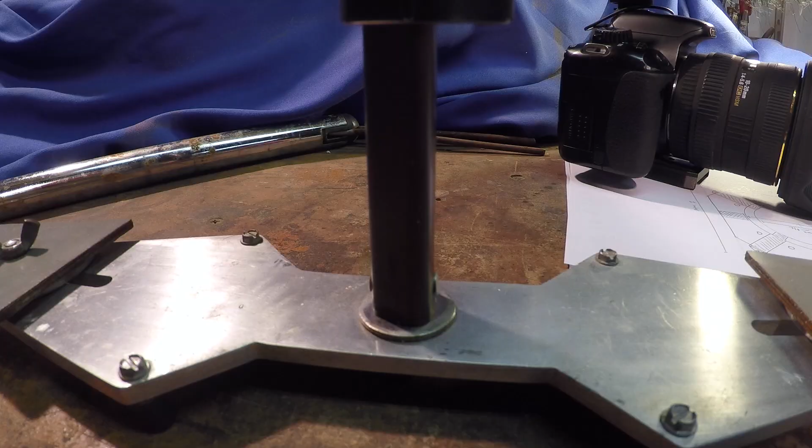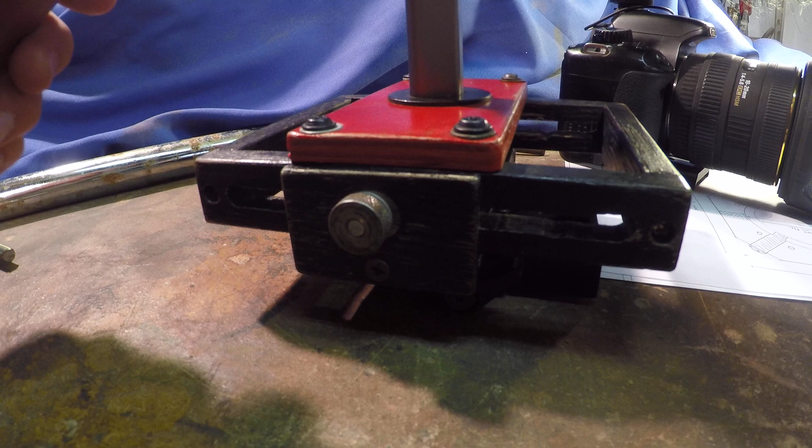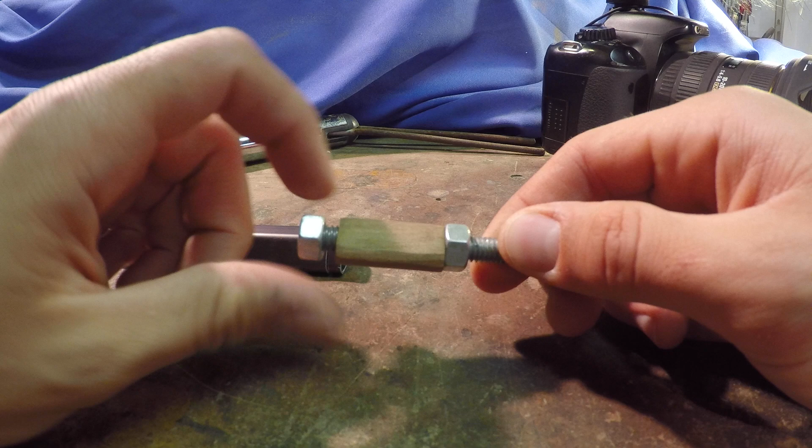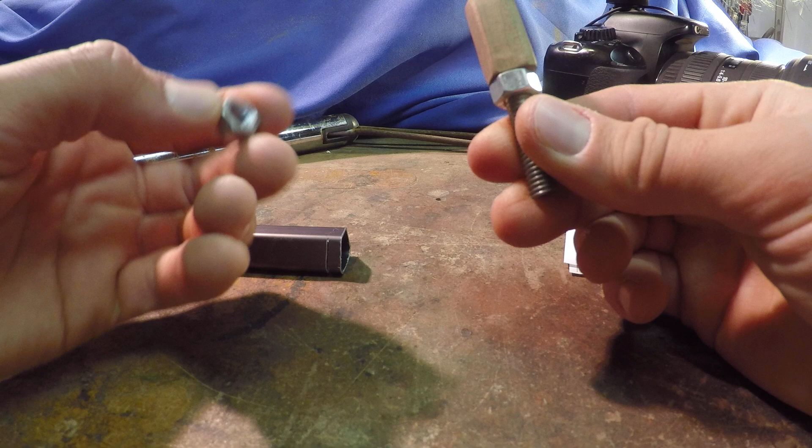Another really common question is, how do I mount this tripod leg to this base plate, or how do I mount the top plate to the tripod leg? People think maybe the bolt goes all the way through the leg, but it does not. Here's how I actually mount that, since maybe it wasn't clear enough in the original video. What I do is get a bolt or threaded rod piece of about 2 or 3 inches for the bottom, and for the top it'd be anywhere around 7 or 8 inches. Then I get the corresponding size nuts, 2 of those.

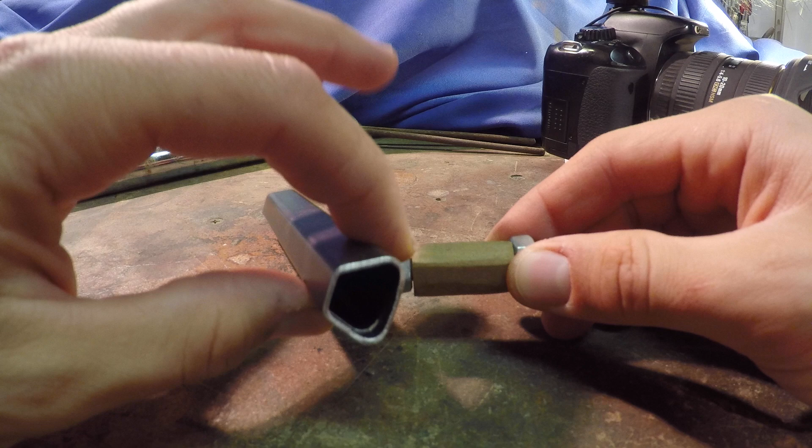Then I get a piece of wood, maybe a 1-inch piece, any kind of wood, doesn't matter. I drill a hole through it that loosely fits this bolt or threaded rod piece. Once drilled, I sand or file this piece of wood down so it loosely fits inside the diameter of your tripod. The key is that it's loose. If your tripod is circular, make a circular piece of wood that fits right inside, loosely, like that.

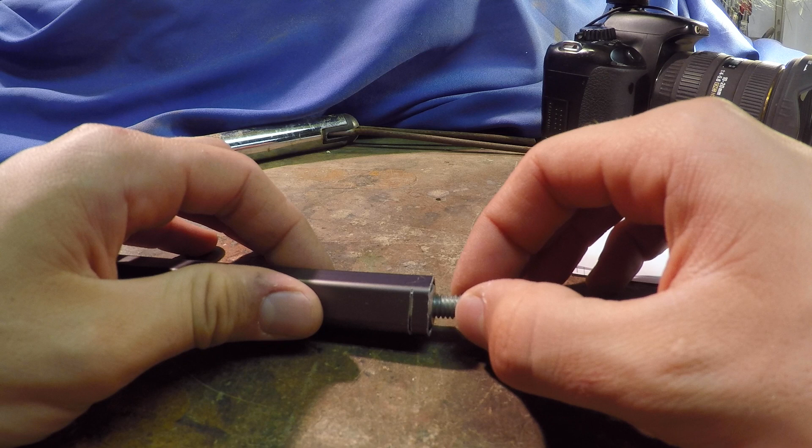Once you've got these bolts and nuts that fit, you insert the contraption with the threaded rod and bolts inside your tripod leg, and then glue it in there. I use epoxy, but it can be any hard setting glue, like quick JB Weld, or even Elmer's or wood glue. But if you're using wood glue, make sure you drill a hole and put a bolt through there — I'll show you how to do that later. Basically, you insert this in here.

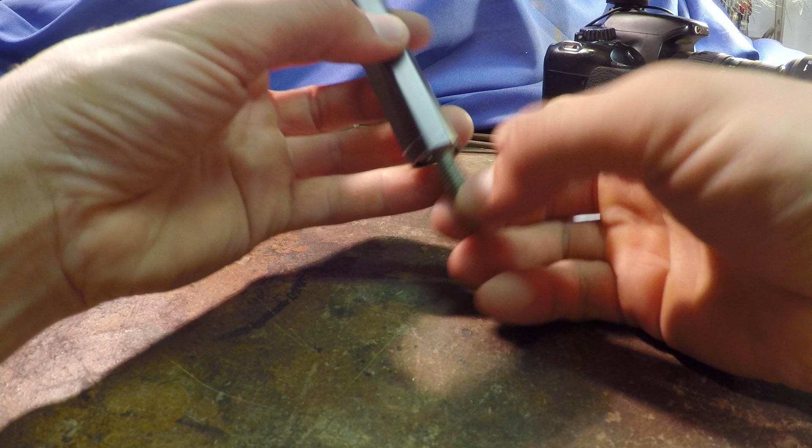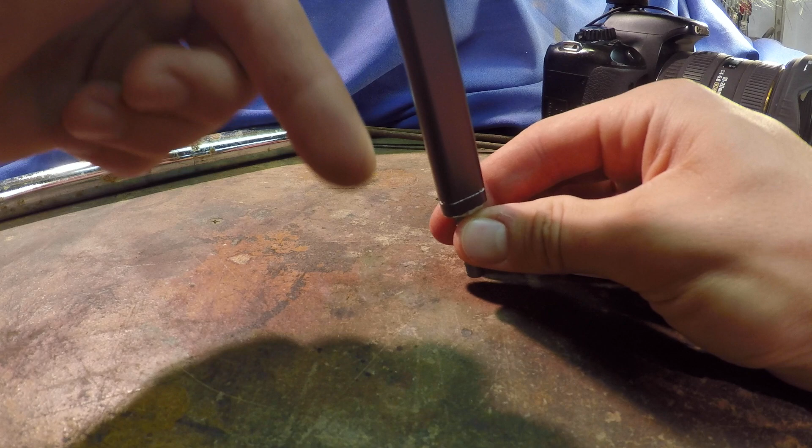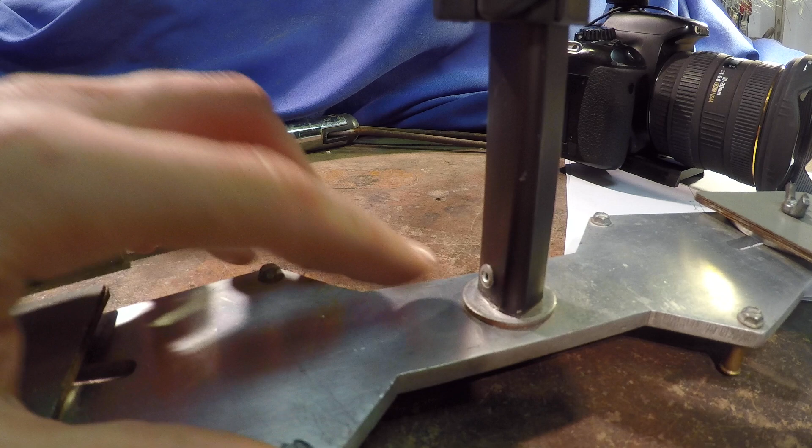Make sure it's aligned perfectly, this way and that way. You pour your glue in there. If it's too liquidy, the glue will keep pouring through, so you might have to tape it around the bottom and pour it in from the top. If you're using epoxy, let it set part of the way, then straighten it out to make sure it's all straight. Once it's set — and this is a very important step — drill a hole straight through the tripod leg, the wood, and the threaded rod, and insert a rivet or screw with a nut on the other end, like this. You can see here what I've done: I've drilled a hole and inserted rivets on both sides.

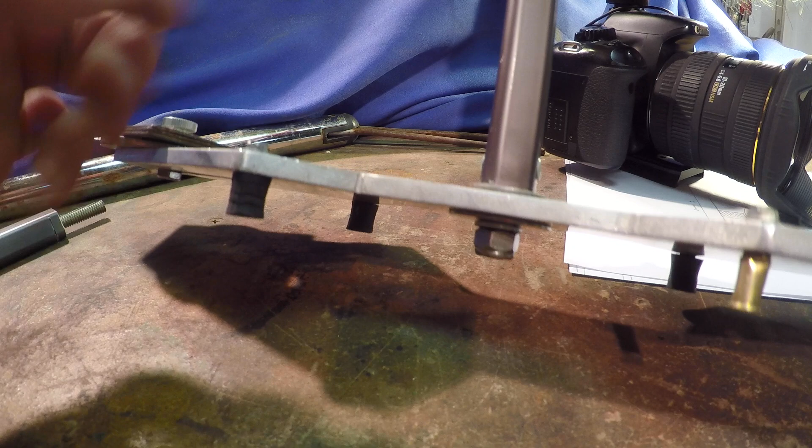This is really important because I didn't do this before: when you tighten the bottom nut, the glue might not be strong enough to hold it, and the whole threaded rod could start coming out. So this is a safeguard with a bolt or screw so it'll never fall out. That's how you attach this bolt into the bottom of the tripod leg. You don't stick a threaded rod all the way through, because then you won't be able to adjust your tripod to length, and that's really important.

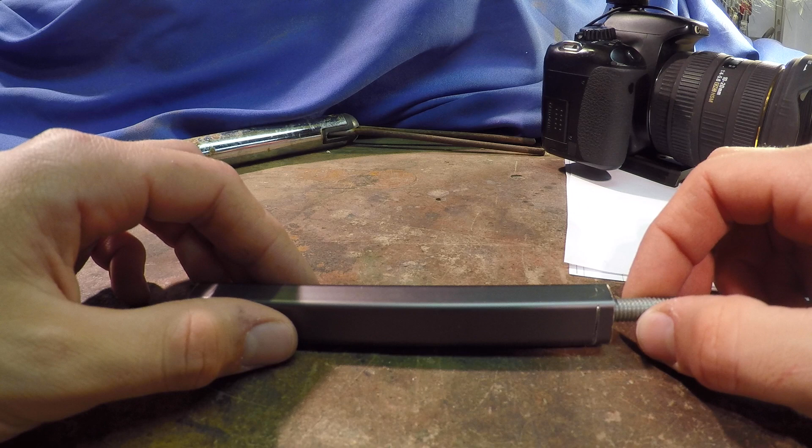People have also asked me where I got this base plate for the bottom of the tripod. The answer is I had a friend mill it for me. He had a metal shop in high school, so I gave him the dimensions and a little drawing, and he made it. So that's a part you might not be able to get easily unless you have somebody who can mill it for you.

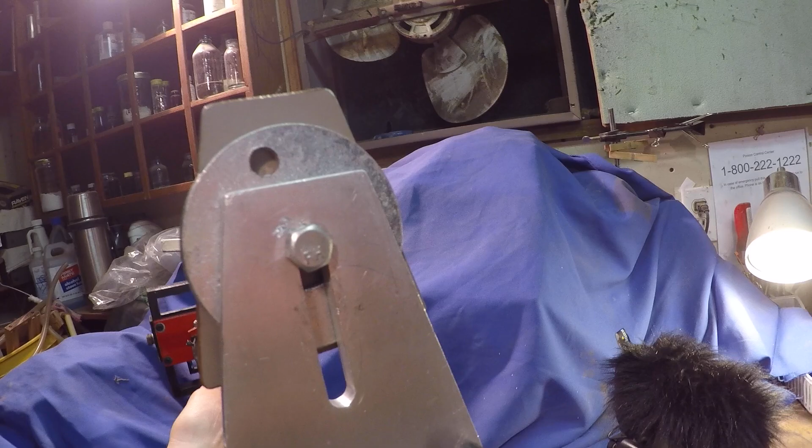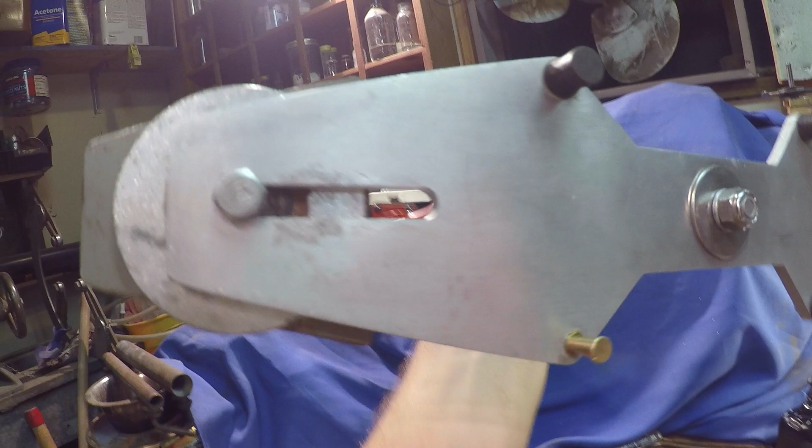But honestly, you don't need something this thick and well made for the Glidecam to work. You can get a simpler solution that might not look as good but will still function almost as well. The only advantage of this one is its strength, since it's really thick, and it has these milled slots so you can move the weight around. But you can make one of these yourself.

You can get some sheet metal even thinner than this, and it'll be just as strong. Cut a hole, drill a hole in the bottom, use a metal cutting jigsaw to cut it out, and if you have time, file out the slots. You can even go buy an aluminum plate and do that. So I had it easy—I had a friend make it for me—but you can make it yourself.

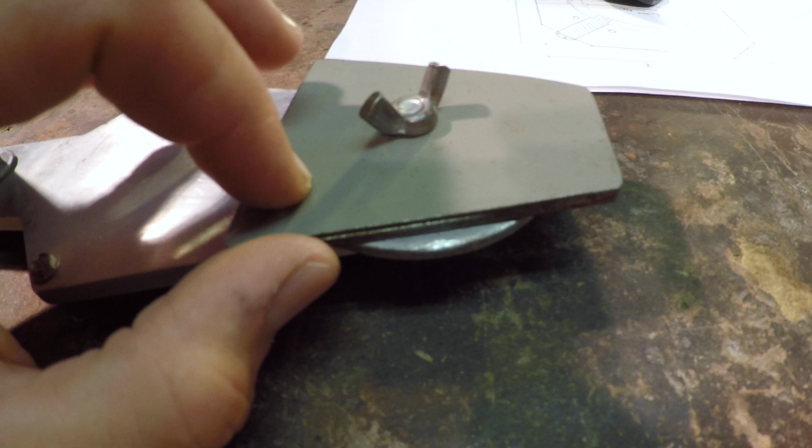Also, I've made myself some custom weights that I cut out of sheet metal instead of a washer, although I do still have a washer on there. I'm working on getting rid of that, because I added some extra weight on the camera, which is this microphone. So that answers that question.

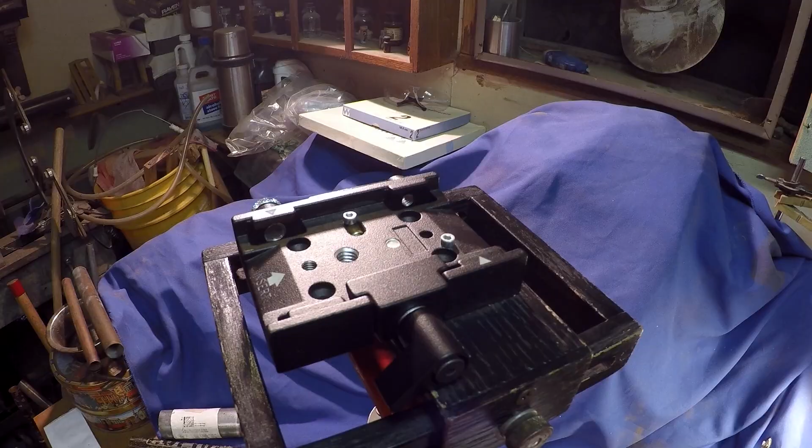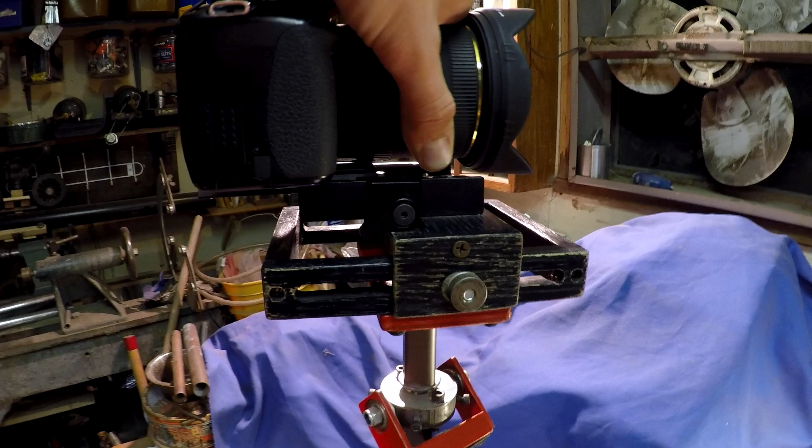Another update I've made is this Manfrotto quick release plate. After going on many backpacking trips, I found you often want to take the camera off the Glidecam, and this lets you do that without rebalancing every time. There's a nice aluminum plate on the bottom that slides right on and clicks into place. You just lock it underneath and you're good to go—it's not going to fall off. It's really sturdy, made of aluminum by a reputable company, and I'm sure it won't move.

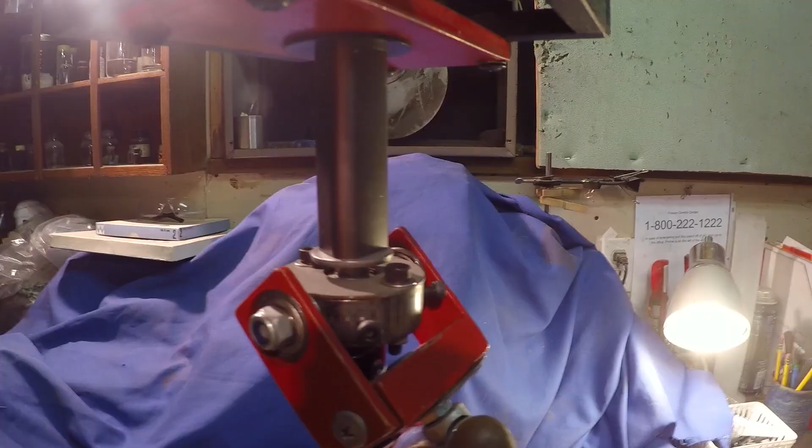That's just a little luxury piece I put on there. I actually paid more money for that one piece than for building the whole rest of the setup—about $50, I think. But we're getting a little more into serious video shooting, and it's a nice piece. I figured if we ever get a nicer tripod, this will fit on there too, making things even easier.

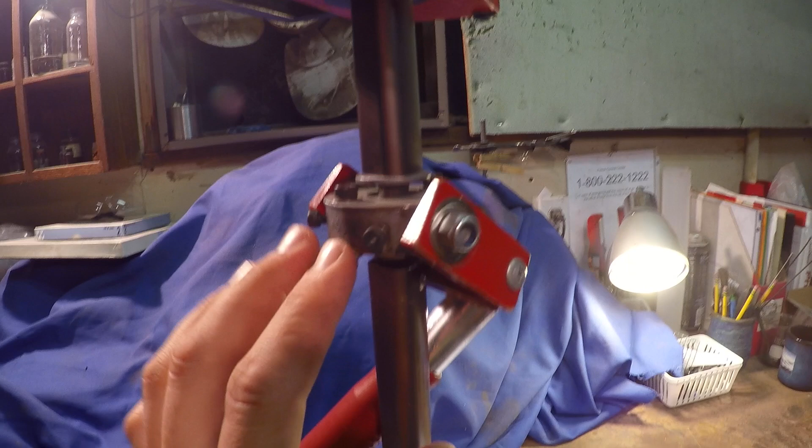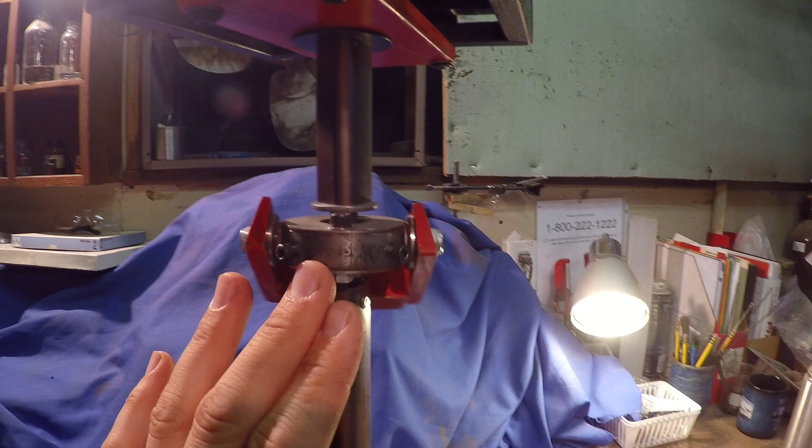The final and most influential update I've made to this Glidecam, which has really improved the performance of the whole rig, is this new gimbal. I found that with the scooter wheels you can get away with using them, but the problem is they're made of rubber, and even a new wheel isn't balanced perfectly well. For the gimbal to work perfectly, it's vital that you can center and fine-tune it.

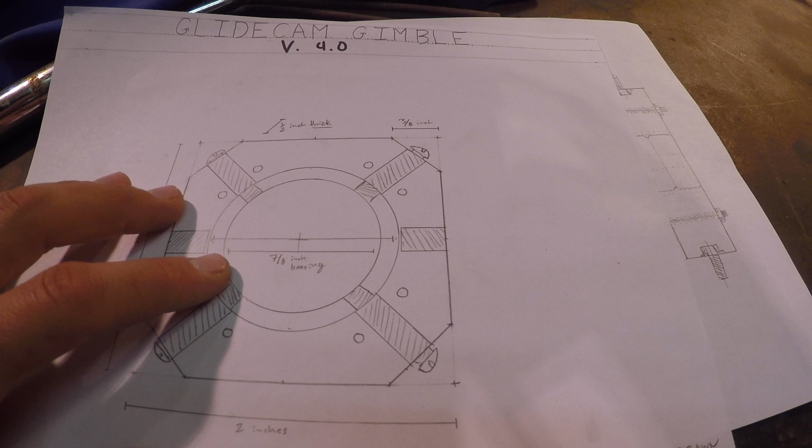So let me show you what I've done. I've drawn a couple of diagrams here—this is a simplified, easier to make version of the gimbal, and here's the final one I have. I'll use these to explain how it works, since it's hard to show otherwise. I thought I shouldn't take the gimbal off, because that'll take a while to rebalance and get everything back in working order.

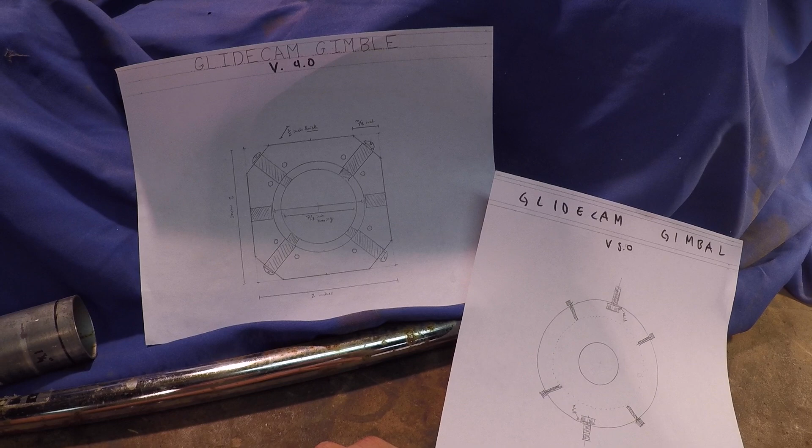So basically what I've got here is a previous version that I made after I took off my scooter wheel from the gimbal. This basically has all the functions of the new gimbal, they're just not as tuned or as perfected.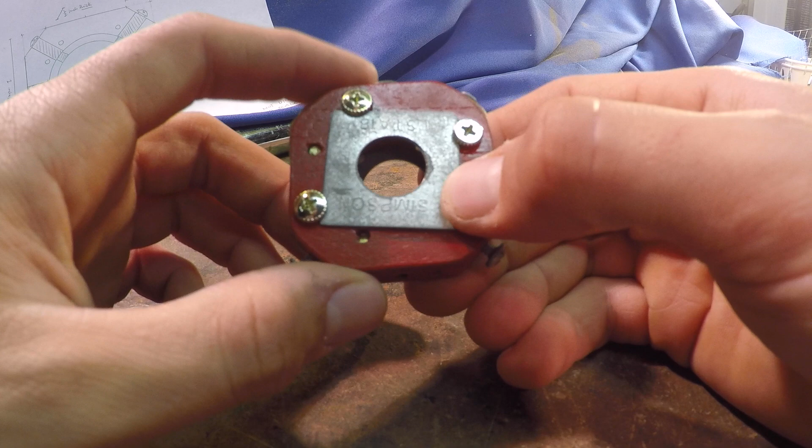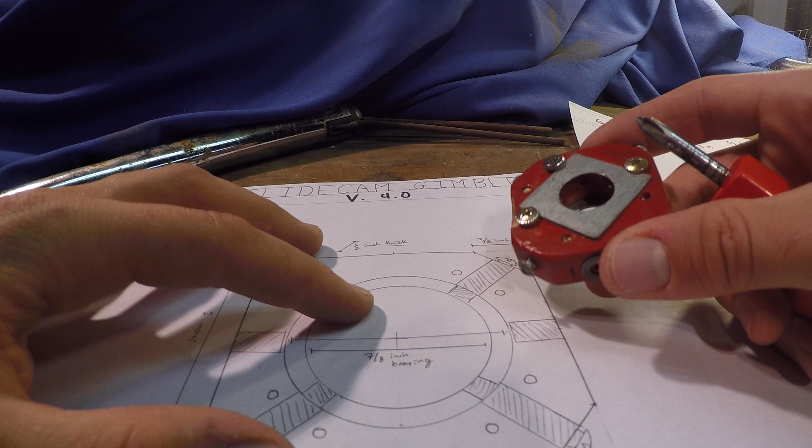So basically what this is, I just cut a piece of wood. You can see here, I think this is walnut or something, a pretty strong wood, although I probably should have used hickory. This was just kind of a prototype. Basically what it is, I'll take these off here.

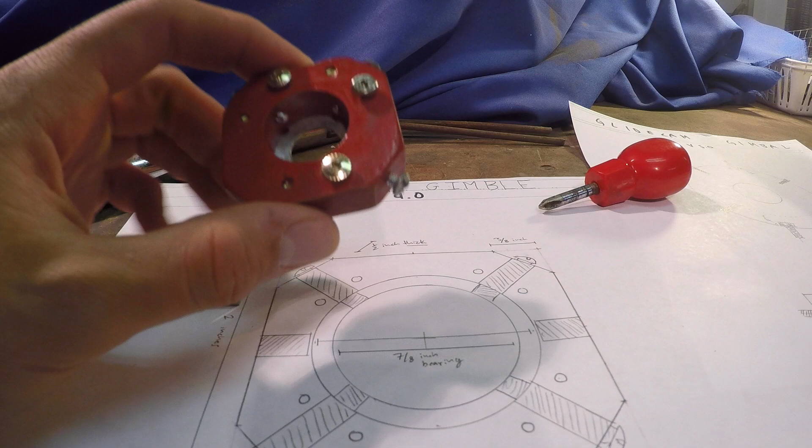Piece of wood, it's about 2 inches or so across, with a bigger hole. I think it's about 1.25 inches or so. Let's see what the diameter of this hole is. It's about an inch hole in the middle. Try to drill it as close as you can to the center.

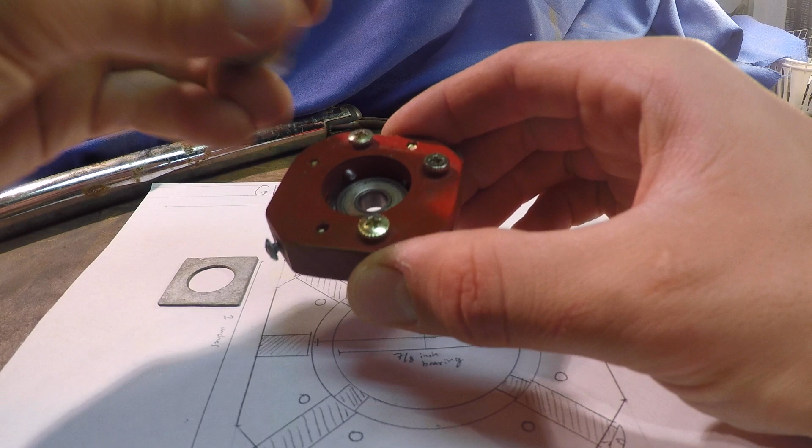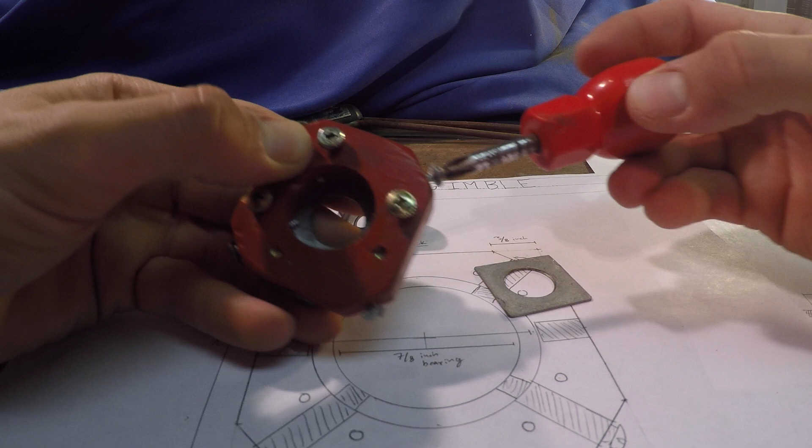Basically what this does is it allows you to get these 2 bearings, put them inside of here, and it kind of acts like a scooter wheel. But the difference is once you get this plate back on here and tighten it down, these screws here, these 4 screws on the outside, I can now twist them, and when I twist them, they will actually move.

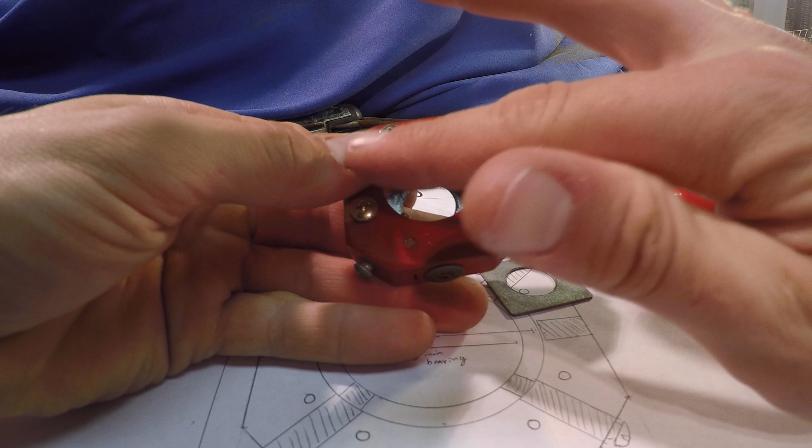You can see that when I twist them, they screw in and out. They will move those bearings whichever way I want them to inside of this whole setup, because you will need to do this to get the center, or the weight of this gimbal, perfectly in the middle.

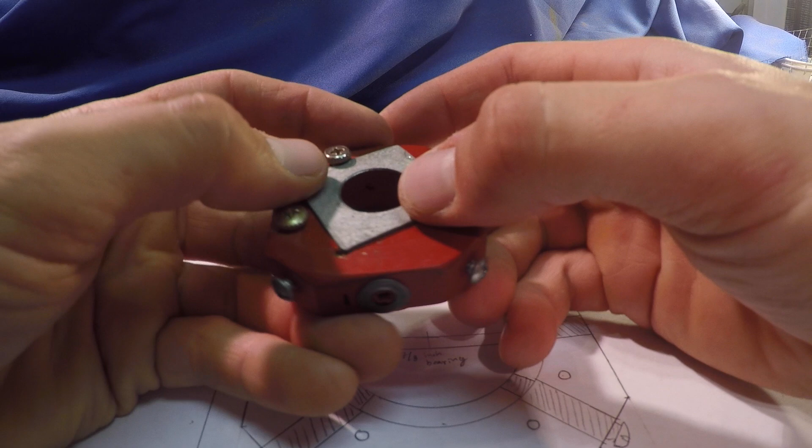So center of gravity needs to be right down the center when you put it on your Glidecam shaft. So it can be as simple as this: just a piece of wood, a nice hard wood. Don't use pine, because this is a pretty vital part of the Glidecam. If it breaks, your camera will fall over, and you might break your camera.

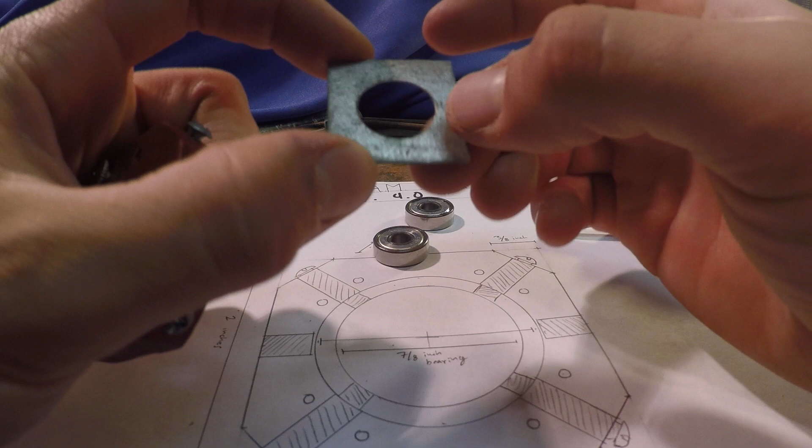So all this one is just some sheet metal here that I've drilled a big hole in the middle, and just put that on both sides. Have the screws to fasten those down to hold the bearings in place, and these screws to adjust the center of the actual gimbal. So being able to adjust or fine-tune your gimbal is really important to allow you to balance the camera perfectly in all directions.

So you can see I can balance it perfectly forwards, to the left, there you go, like that, facing towards me, perfectly balanced, towards the bottom, and to the right. This allows you, when you're shooting and you want to make a shot like this, when you turn, it'll be balanced all the way through the shot.

Whereas with the scooter wheel, the issue was that you could make it perfectly balanced forwards, and it would hang there, and you could shoot a perfect shot walking forwards. But as soon as you began to turn your camera, it began to slide, and it would not drop straight down like it's supposed to. So this really improves the functionality and the versatility of shots that you can make, and that's a really important part.

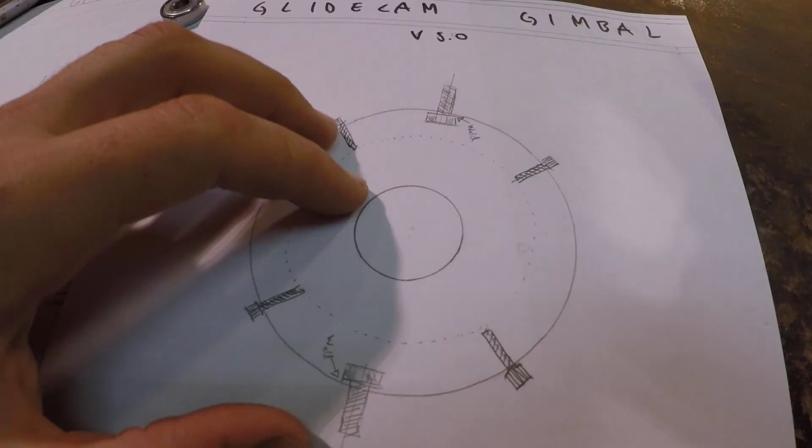So I made a new version of the gimbal, and to make this one yourself, you might need a little bit of more advanced tools. You will need a welder. You might be able to get by without one, but it'd be really handy.

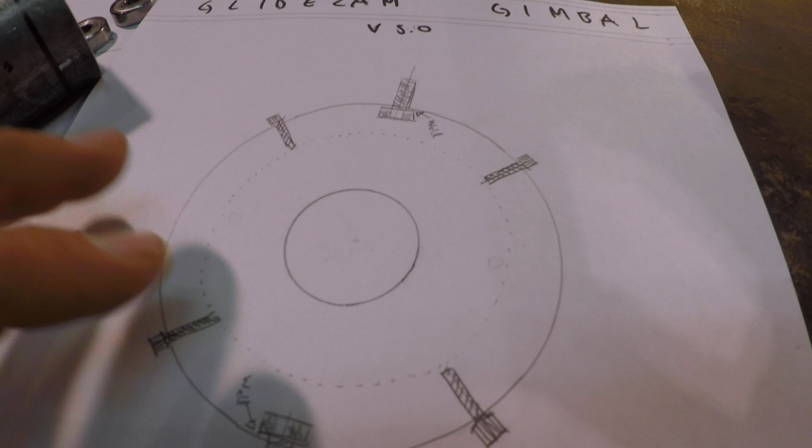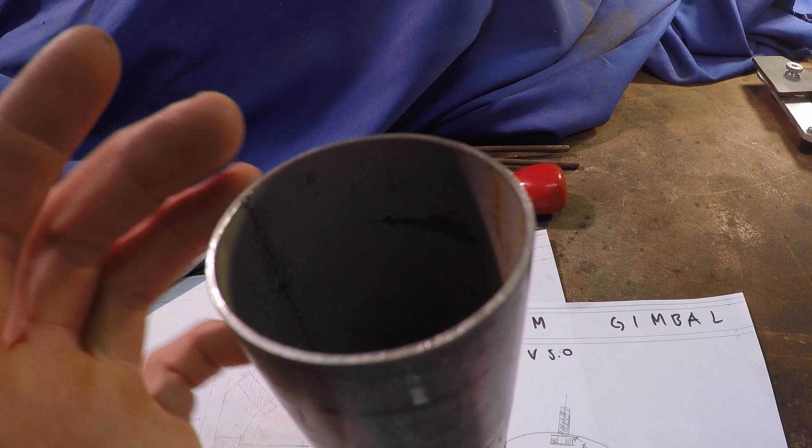So the way I made this is I got a pipe. I believe this is a 1 3/4 inch outer diameter pipe. It doesn't really matter as long as it's within 2 inches or so, a pipe like that. And I got a smaller pipe with a 1-inch diameter on the end. I cut both of these pipes to the length of exactly 2 of these bearings.

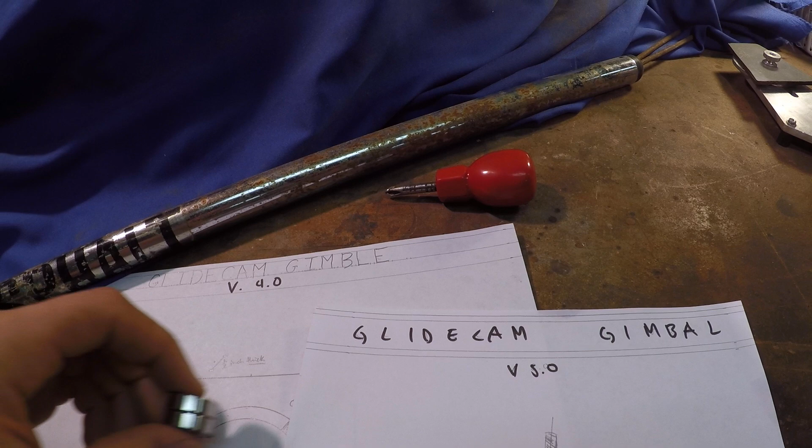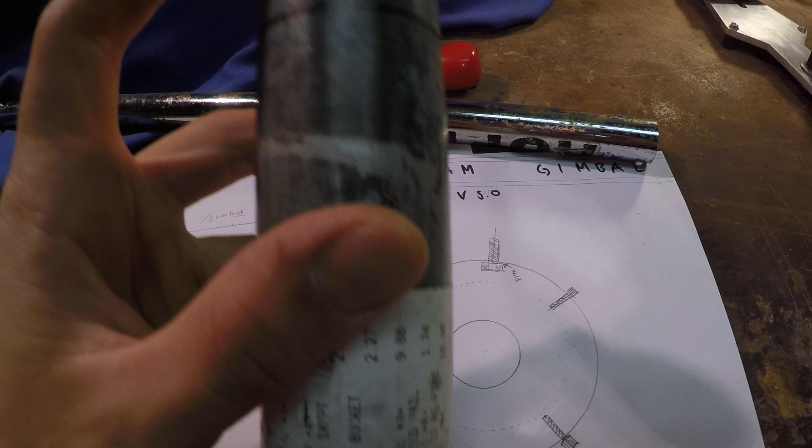So with the 1-inch pipe, a bearing will slide exactly inside of there, and I use that to go inside of the actual gimbal, and that holds those 2 bearings together so that they're not independent. They kind of act as one big bearing. The bigger 2-inch or 1 3/4-inch pipe acts as the outer piece. So you cut that just to the length of these 2 bearings, or maybe a hair shorter.

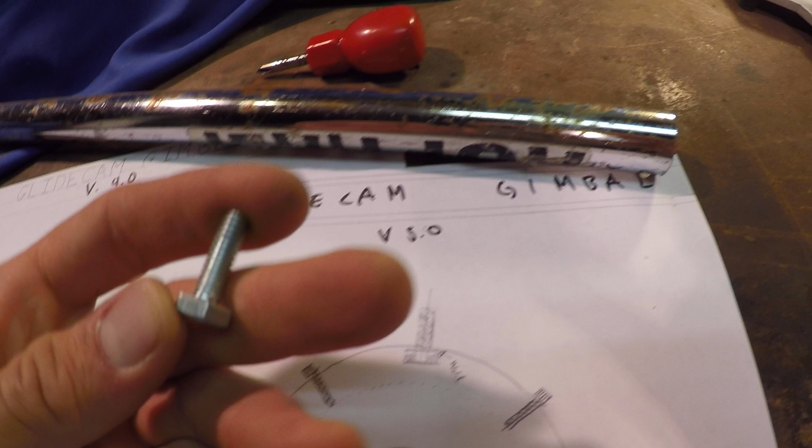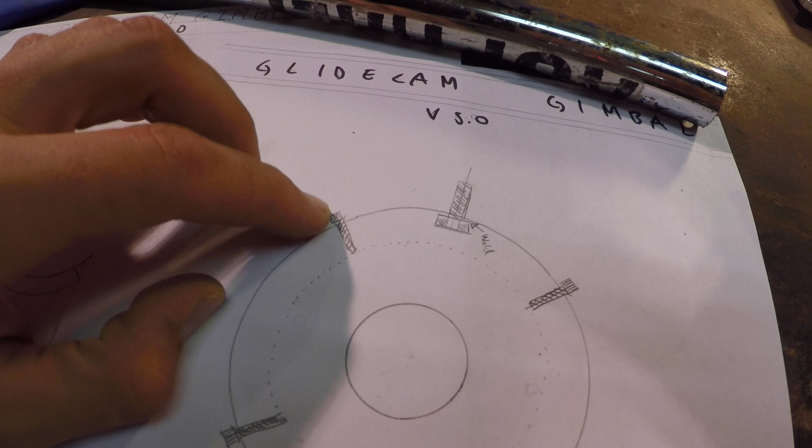Then you will also need 2 of these 1-inch, 1/4-inch coarse thread bolts to go on right here and right here. And also just some fine thread machine bolts, 4 of those, maybe 1 inch as well. And then you will also need a couple longer ones, maybe 1.5 inches, to hold the whole thing together.

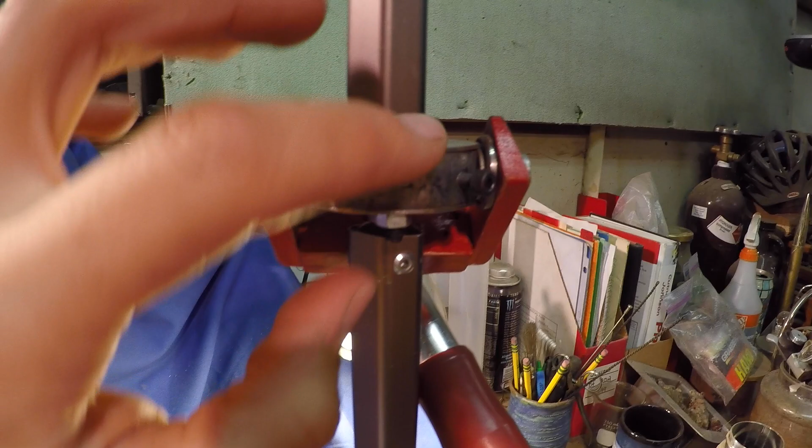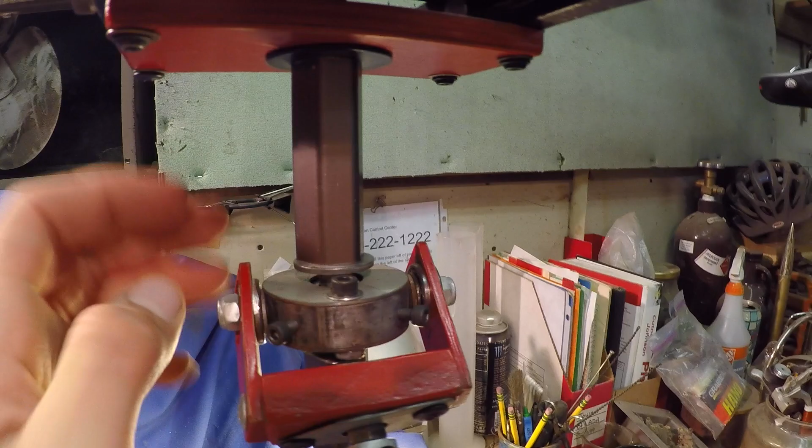So you can see here, I got my 1/4-inch threaded bolts in there, right here. Then I have those 4 machine bolts on the outside, and 2 longer machine bolts to hold the whole thing together.

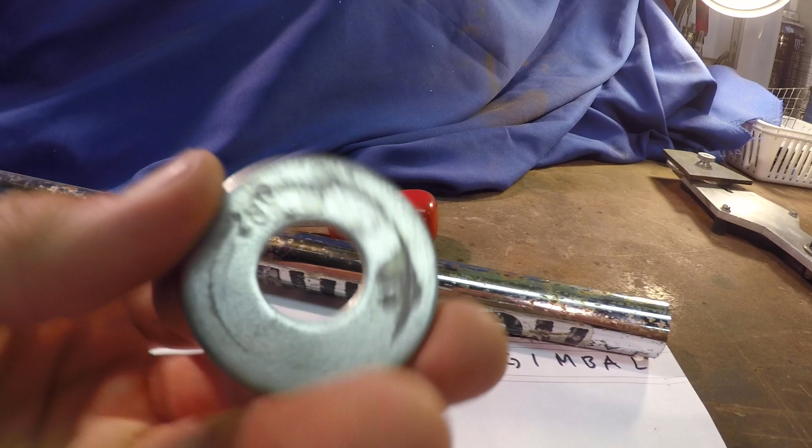So once you get this, you also need 2 cover pieces. I actually cut these out myself and shaped them to fit on there. You could go to the hardware store and find some washers that would fit exactly on top, and that would save you the hassle of cutting them out and drilling a hole in the middle. And if you can get a thicker gauge, it'll also be stronger.

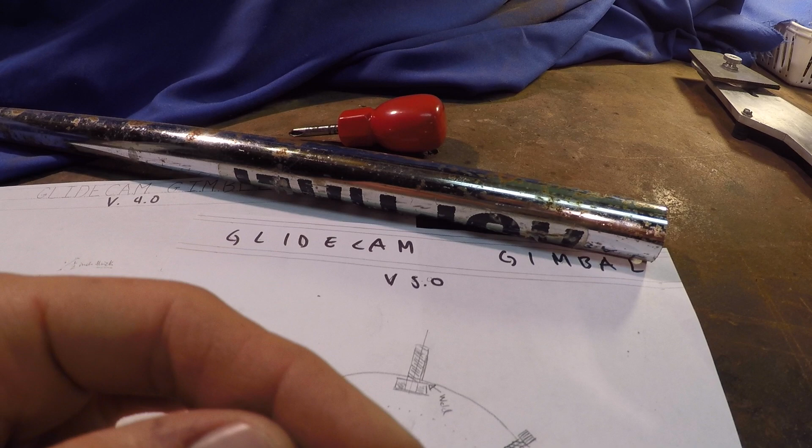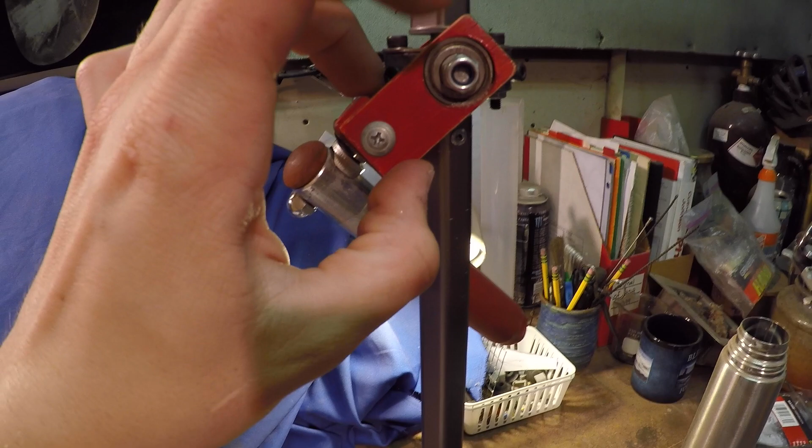Once you get all this cut out and the pieces fine-tuned and fitting together perfectly, you'll want to weld, if you can, these 2 bolts like this on the outsides, and this is what will mount to the actual bearing on your gimbal handle. Also, if you can, weld the bottom circle piece, or the washer, to the wider pipe.

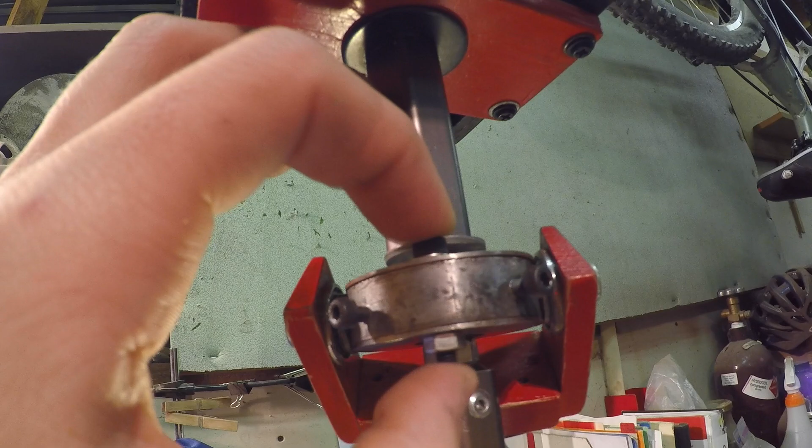Again, you don't have to do this. You can just fasten it all together with these bolts, and you could leave the 1/4-inch bolts unwelded, and then it'll be loose until you tighten everything up. But I found that welding it together, or at least using a quick weld type of material like JB Weld, makes it a lot easier to adjust, and if you loosen things, it won't become wobbly.

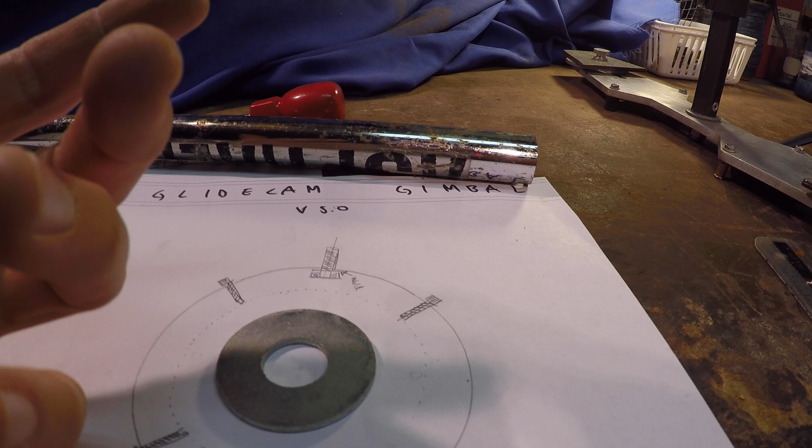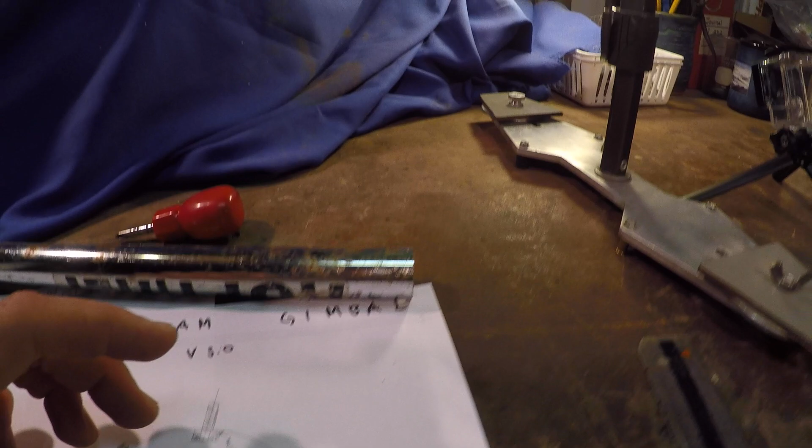And then you leave the top part unwelded, and that gets tightened down with the bolts. So if you need to do maintenance or pull out the bearings from inside there, you can do that.

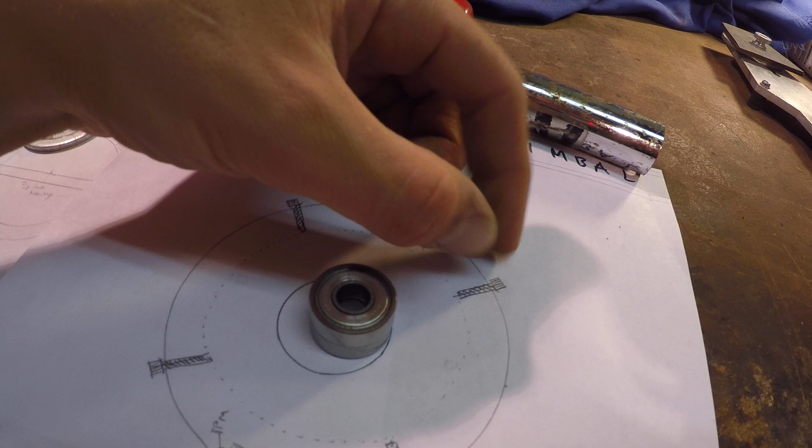So what this allows you to do is it allows those bearings in the middle, right here, to be adjusted by these screws. You can, for example, unscrew this bolt a 1/4 turn and then screw this bolt in a 1/4 turn, and that would move your bearings that way. Or if you unscrewed both of these and screwed both of these in, that would move the bearing that way, and so forth.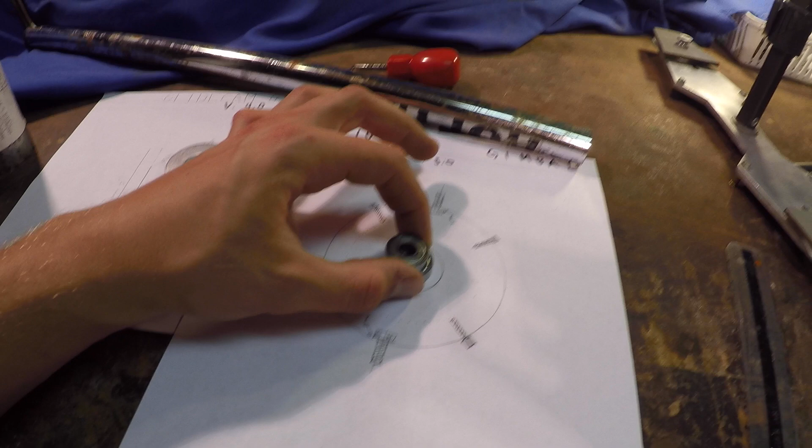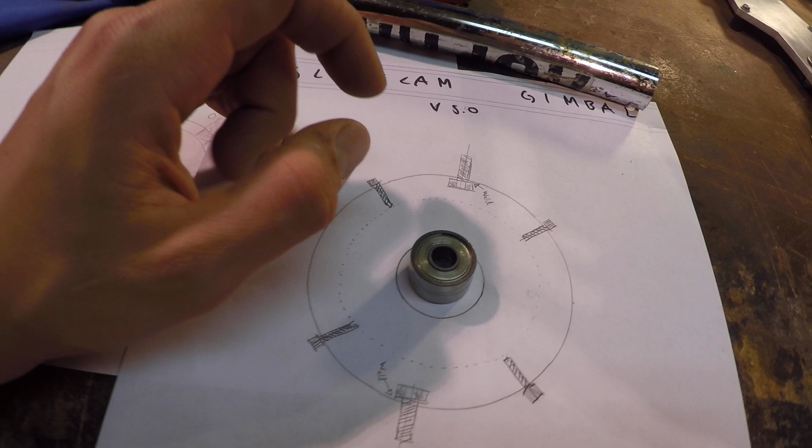I've had trouble finding a video exactly of how to do this on YouTube, but if I do, I'll put an annotation in the video linking to it, and that'll help you out with the gimbal.

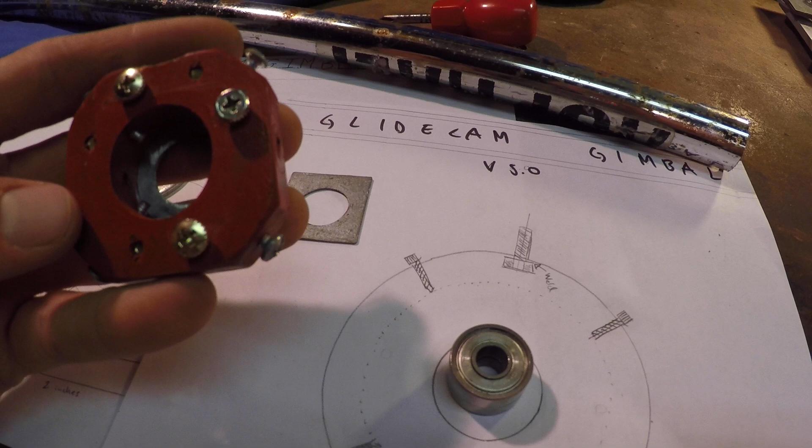So there you go, that's kind of how this works. You can make one out of wood. It will work, it might take a couple of tries, but it's just wood. You can reuse the hardware, and if you fail on one piece of wood, get another one. But again, if you do use wood, use hardwood. Probably the best is hickory, then ash, then oak.

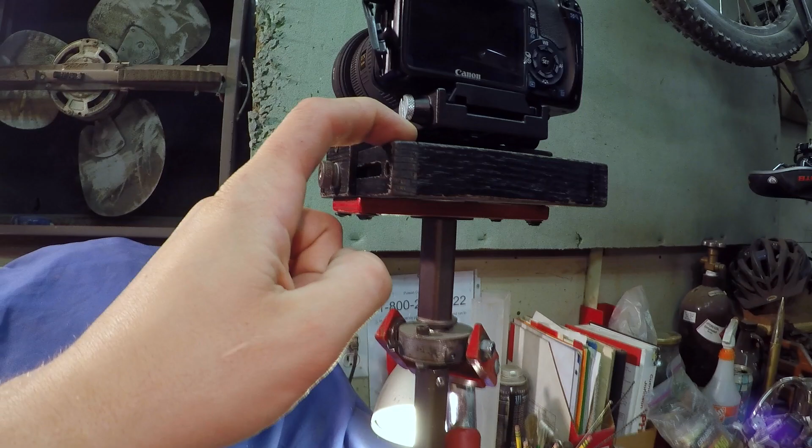People have been saying that they wouldn't trust my camera with wood, but this is all hickory wood, which is actually really strong. Axe handles and stuff are made out of hickory wood, and they put up with quite a bit of abuse. So it will survive if you do it right.

I've glued it, screwed it down, and it's been going for 4 or 5 years now. It's been through miles and miles of trails and abuse and water and everything, and it's still going strong. Alright guys, I hope that helped.